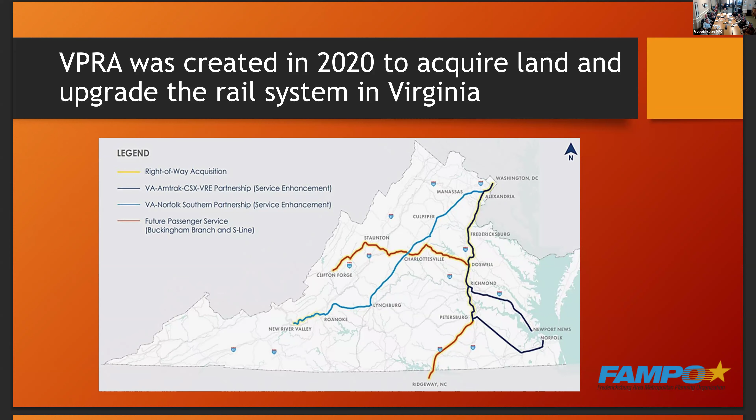The Transforming Rail in Virginia program includes a whole bunch of projects down the line from Union Station all the way to Richmond. The long-term plan is to have a third track all the way down to Richmond, but they're building it in sections, and it will take quite a while to finish it all.

If you look out the window as far as the river, you'll see the bridge across it only has 2 tracks, and there's no space to add another track on that bridge. So you can imagine what it's going to take to put a third track across the river. It's a huge program.

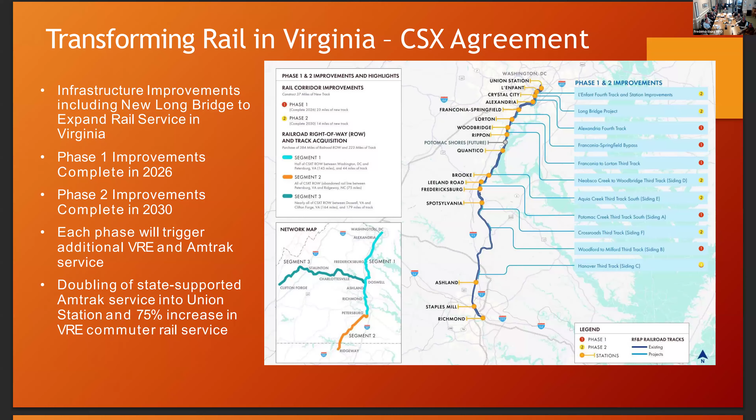Each one of those dots represents a new section of track or a new project that has to be built, and we'll talk about those as we go through the presentation. Phase 1 is largely complete now, and phase 2 will be complete by 2030. It involves, well, we'll show what it involves. I'm not going to read everything on the slide, so let's move on.

Here are some of the major projects. The first one is to run 4 tracks from Union Station through Alexandria and a portion here to Springfield. What happens over this section is that the Norfolk Southern track branches off and goes down to Manassas. But we currently only have 2 tracks across the Potomac River, and a new bridge has to be built to carry another 2 tracks.

So we're trying to get 4 tracks through to roughly Franconia, and then from there down 3 tracks all the way to Southern Stafford effectively, but eventually to Richmond.

In our region, there are a couple of projects. The Aquia third track section and the Potomac Creek third track section are going to be added, so those will have a third track through there, and each one has a VRE train station that has got to be upgraded as well. So that's going to be worked on.

We've already upgraded the Fredericksburg train station. I think you remember seeing some work going on up there. We've extended the platforms so they can take much longer trains, put up new signage and new information screens, and built the new staircase into the back of our parking lot, which you could see on the way out. So that's already been completed.

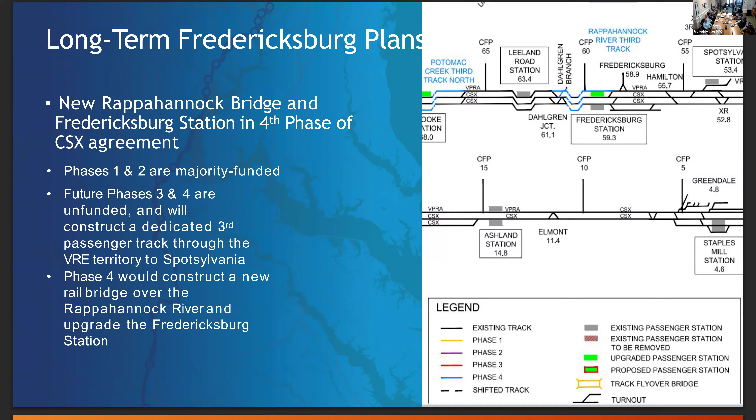Do you know how old the bridge is? The original bridge is very old—I don't actually know when it was built. This one in Fredericksburg is going to be 100 years old in a couple of years, and that's not even the first one; that was the rebuilt bridge, raised above all these roadways.

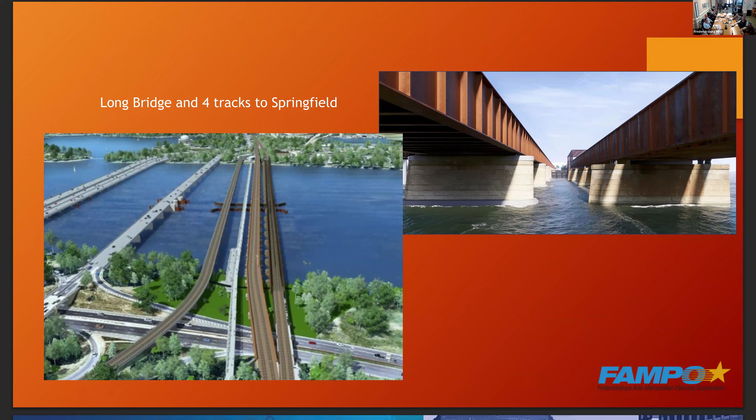The new long bridge across the Potomac is actually not going to be one bridge, it's going to be 6 bridges, because there's a bridge to the island, a bridge from the island across to the other side, and then another bridge over the roadways. But they agreed to build a bike and pedestrian bridge as well. So that's 3 bridges for the rail and 3 bridges for the bike and ped improvements. It's a huge project.

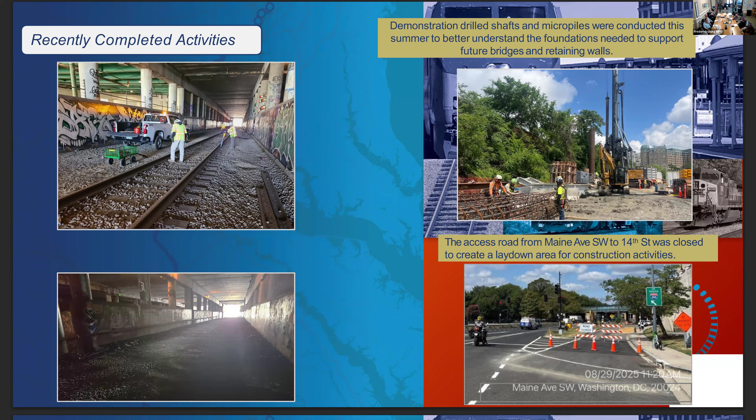So they're in the river already drilling, doing soil samples below the water, because they have to sink pylons and things into the riverbed itself. And they're testing alongside, I think north of the river, doing soil samples because they have to build a new bridgeway across all those roads as well. That's the existing bridge, and here you can see west of the bridge they have to fit in a new bridge. Next one. Okay, the Springfield bypass.

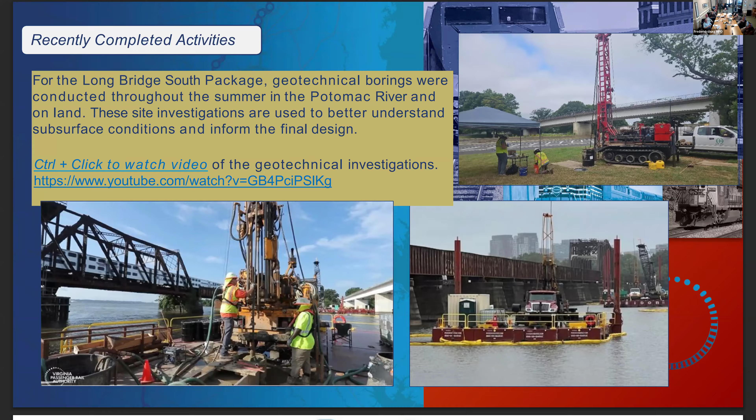This is complicated, but it's fairly simple to explain. We bought the rail right of way to lay the extra tracks in 2 sections.

From Union Station through to Springfield, all of the existing train stations are on the west side of the tracks. South of there, all the way to Richmond, all the train stations are on the right-hand side of the tracks. So they bought the left-hand side right of way and the right-hand side, the western side and the eastern side. That leaves you with this.

So they're building a big concrete flyover to switch the passenger trains from the western side of the CSX tracks across to the eastern side of the CSX tracks. And to do that, they're going to build this really expensive big concrete flyover in order to get across. You'll see some pictures of that happening here.

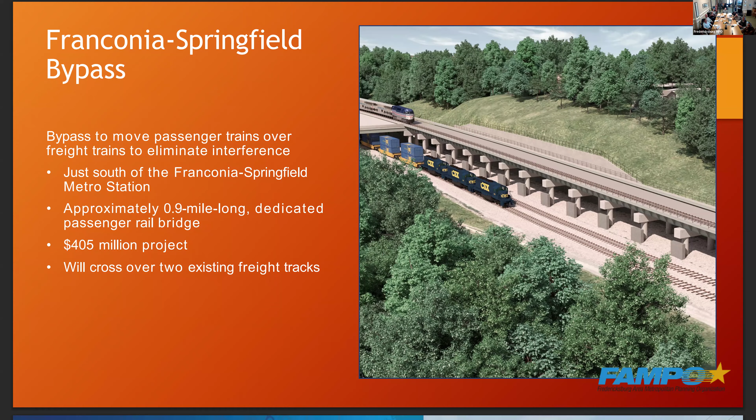And the idea eventually is to build a fourth one. One day when we're rich and have got a lot of money to spend, we will build a fourth track so that those 2 tracks will be CSX and these 2 tracks will be for passenger rail only. Then we can separate freight and passenger rail, because the freight trains go really slow, and if you're in a passenger train you don't want to be stuck behind a freight train because then your journey takes forever to get there. So we're trying to separate the two.

And this is to be able to get to the other track. You've got to be able to get into the center without walking across the tracks and endangering yourself. So they built elevators and stairs to get over to the third track. But this already exists - we finished this 9-mile section of third track, and they upgraded the station at the same time. So that's the first piece of the third track that's already complete.

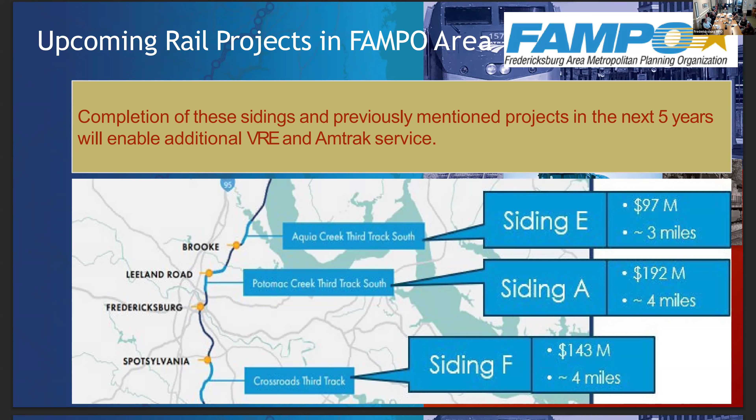So these are the next sections that will affect us. This one is going to be built first, together with the upgrade of the Leeland Road train station. We've done the Fredericksburg station. We're about to do the Leeland station and improvements, as well as the third track. And then later, in a couple of years, they'll get to the Brooke station and that other section of track that has to be built.

These are just some other details. They're buying new Amtrak rolling stock and other things.

So this is the part you already know. We lengthened the 2 platforms in Fredericksburg and put the back stairs here into our back parking lot, as well as remediation, repairing that bridge, this bridge, and one other bridge on the section. It's already done.

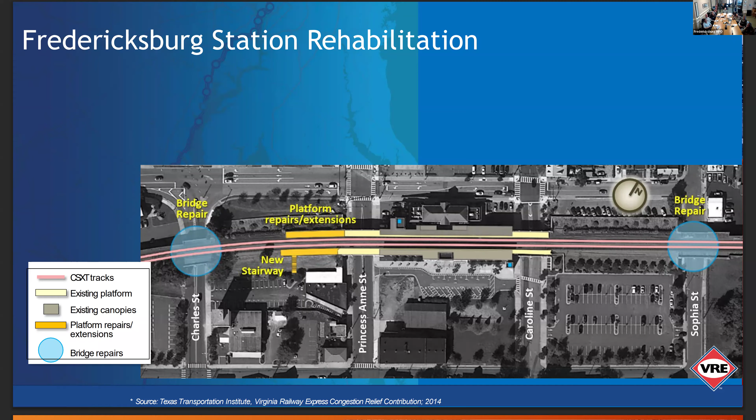This is what's happening now in Stafford. They've already started out there. We're acquiring extra right of way there. These 2 tracks exist, and this is what's being built by the Virginia Passenger Rail authorities - that third track through that section of Stafford.

Not exactly, I suspect. That shows wooden cross ties. Aren't they using concrete cross ties? No, they're wooden. If you go up here to the train station, you'll see they're all wooden now. Go and have a look. In fact, they're replacing the wooden ones up here above us with wooden ones again. The new ones are lying in a pile that are installed. Did they use concrete cross ties in Quantico? Yes, but here they're using wood. Huh, I don't know why.

How long did the wood last? Quite long. Well, in Africa, they use ironwood, which lasts for a long time. It's very hard wood that they use, unlike a lot of the softwoods that get used for wood carving and furniture. No, I put some pennies on a track at Widewater, and I was watching the trains go by, and that track was actually going like this. It's meant to move because of the ballast - the rock underneath, the crushed rock, is there to absorb some of that movement.

In fact, the tracks also need to move sideways because you'll notice on the track you don't hear that clickety clack sound that you used to hear on trains, because they've welded the track together. So the expansion joints are gone. If you weld it together and it can't expand, when the rail gets hot it has to expand sideways instead of lengthways, because they welded them together.

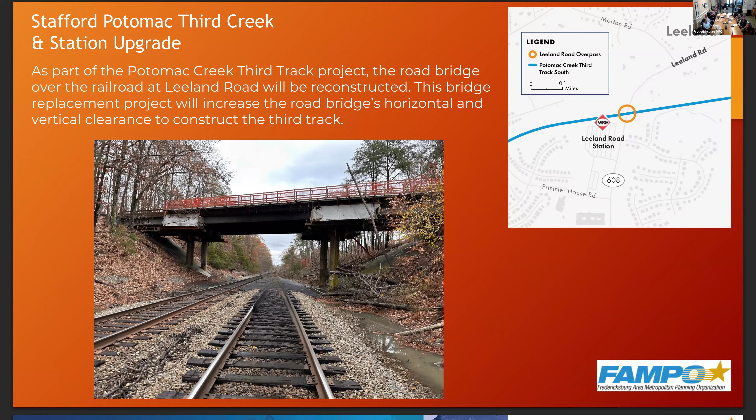So that's what we're in VRE. VRE is doing the station upgrade, and VPRA, the Virginia Passenger Rail Authority, is adding the third track. It's two separate projects, but they're doing them simultaneously to limit all the disturbance. So they're lengthening the platform and putting a new pedestrian access into the parking. They initially were going to put a whole new parking situation here, but they found that because ridership hasn't grown as fast as they predicted, they don't need the extra parking right now. So in future it might be done, but not now.

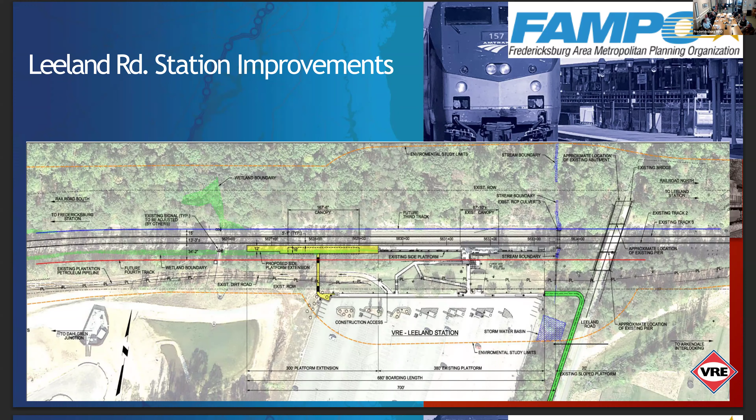They're also putting a bike and pedestrian path down the side to provide access for people who bike to the train station. So there's an upgrade, and this is the roadway bridge - the bridge that has to be removed to make that all happen. That's going to start happening from January on. It won't all happen in January, but the demolishing work will start.

You can see here improvements - they are increasing the parking capacity, but they planned a much bigger expansion and cut it down to a smaller package, estimating 225 additional parking spaces. Sorry, from 225 to 1,050 was the proposal. I have a feeling this is an earlier presentation that's been revised, so I don't think it's as dramatic as this, but I'll check for you on that.

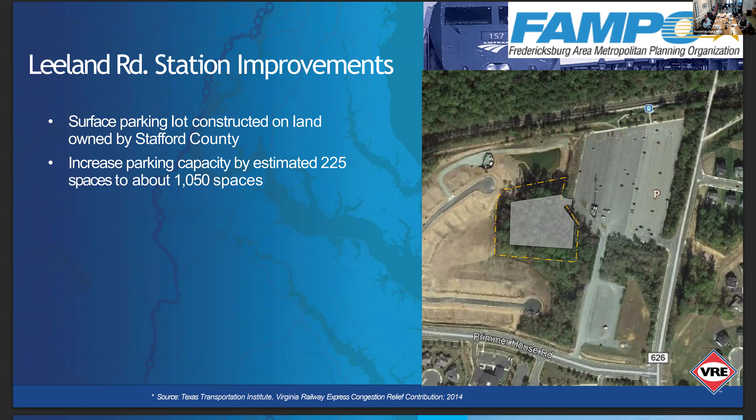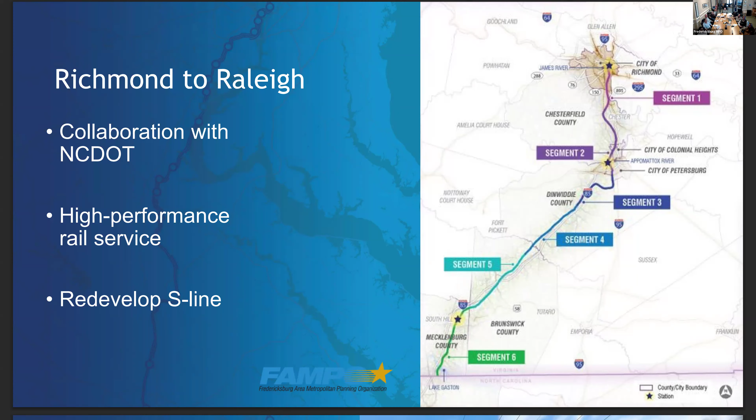So one of the delays is going to be removed by doing that, because when you go up to Union Station, they stop for half an hour because they have to take off the diesel locomotives and put the electric locomotives on. This is going to do away with that 30-minute delay. The same locomotive can go all the way to Boston. So this new train set is designed to do away with that - it'll provide a quicker journey if you're going further north, or if the northern people are coming further south. They won't have to wait in darkness because they turn off the aircon, turn off the lights, remove the locomotive - it's a bit of a process. So that will reduce the dwell times at Union Station.

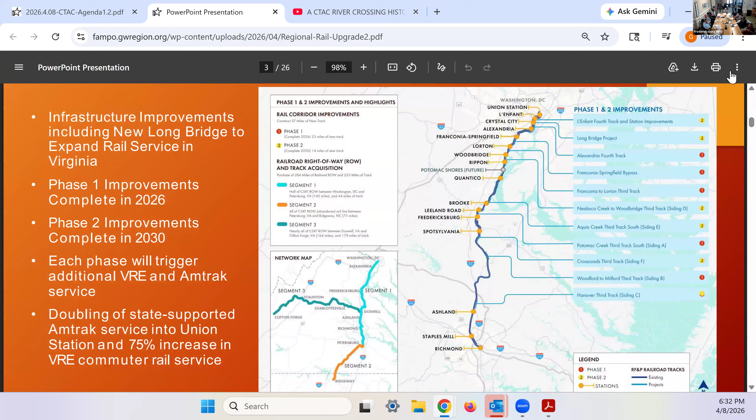Hopefully. I mean, it's a lot of money to build. Can we go back to like the third slide or so that has 3 tracks and 2 tracks? It's about the third slide. Keep going. Another one. Next one. Okay, yeah, that one. That one? Yeah.

See, I just don't understand how they can increase capacity unless the third track is all the way through. They pass — faster trains will pass the slower trains. But this doesn't seem like on the third track section capacity is long enough, because then you're gonna have to have some trains speed up and others slow down in order to do it. So it's gonna be a difficult situation.

And what if the train is on the far track? Are they gonna switch over 2 tracks? So all of that gets planned in advance, it doesn't just happen. Yeah, I understand that. So what they do is plan the schedule so that this train will get to that siding at the right time approximately. It might involve a freight train having to stop for 3 minutes, but generally they try to plan the schedule so that they move past each other.

The trouble now is you can't plan the schedule as easily, because weather events occur, a train leaves late, and then the entire schedule is scrapped, because that train was meant to get to that point so you can go past on the other track. Now it's not at that point anymore because one of them is late. And when you only have 2 tracks, it limits your choices, because you've got trains coming south and north and they have to pass each other. When you've got more track, there are more opportunities to get around the problem.

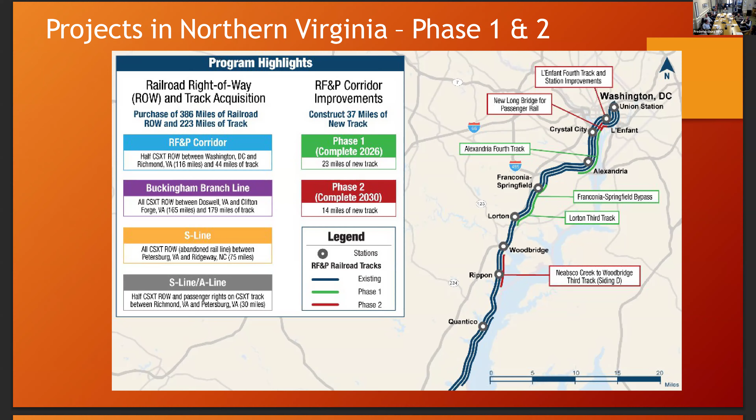There's only 2 tracks in the city of Fredericksburg, and no plans for a 3rd track. In fact, they just built the platforms up there on both sides of the 2 tracks. So if they do build a 3rd track in Fredericksburg, it already exists down to Spotsylvania. The Spotsylvania station is built on a siding, not on the main line. So that third track siding already exists there, but it doesn't come all the way into Fredericksburg.

There's a gap there in Fredericksburg with no 3rd track. The reason for that is the bridge and the train station, and this raised track. You've got to build a bridge over the river for the third and fourth tracks. You've then got to break down the train station on this side to fit the third track in, because there's no space for it. The platform is in the way. So they're going to have to totally break down this side of the train station to widen the platform, the concrete under the platform, to make room for the third track. And then you're going to build that raised portion all the way through until you get past the cobblestone condos, where it gets back to level ground again.

That project's going to cost a lot of money. This building might be in jeopardy too — the side near the track is going to be real close to that new track. So my guess is they will buy out this building so they can remove a portion of it to fit everything in, but I don't know, it's too early to say. They might also have to remove that new platform they built. Well, they might put the track on this side of the platform instead, so you'd have a center platform rather than a side platform. But that's TBD — they haven't even started the design yet, so there's too much information we don't know.

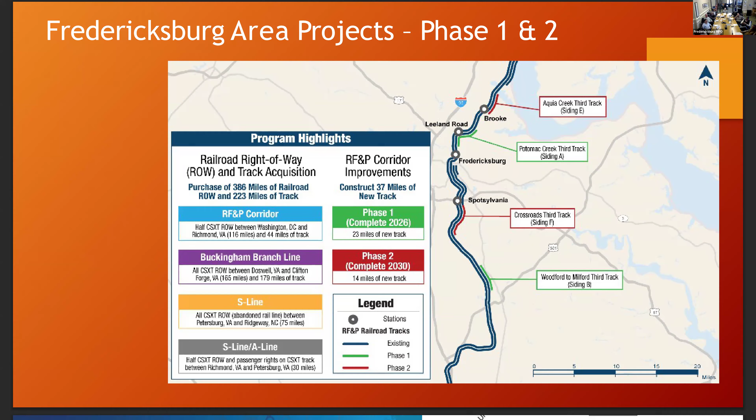I'm going to sit down and get it in before somebody else asks.

Thank you, Director Alice. Moving on to 7B, the long-range transportation plan presentation. Eugene, you're up.

So we wrapped up our long-range transportation plan 2055 transportation goals and needs survey on March 17th, a few weeks ago, with 1,073 survey results in total. For this presentation, I'm first going to give you an incredibly high-level overview of what we've seen, and then following that, I'm going to go over how you can access the survey data yourself.

Reviewing the comments, we've seen broad trends pointing toward an emphasis on improving communication between transit agencies and the public, pessimistic attitudes toward infrastructure improvements due to existing infrastructure, slow progress, and public disinterest, an extension of Metro down to Fredericksburg and VRE down to Richmond, a need for more promotion of our FAMPO committees, and a VDOT report problem. There's a desire for developers to assist in improving surrounding transit infrastructure. There are frequent mentions of traffic light timing, and many comments about Route 1, Route 3, 17, and I-95. We also have several specific comments throughout the survey results — these are just some examples of those.

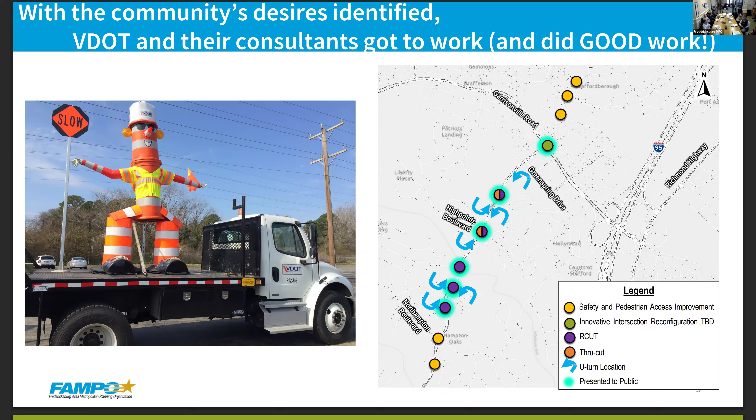Next slide. So VDOT and the consultants got to work looking at the various intersections identified within the survey and the safety results. I will say, finally, I was a part of this. They did very good work as far as identifying the treatments, doing the site visits, trying to identify what can be done and what are the better treatments within the constraints of the environment. So they came back, developed treatments, and put out another survey. Next slide, asking how folks would want it.

And this was kind of a shocker to a lot of the stakeholders in the group. We actually got very strong opposition to the treatments and projects presented on these roadways. If you look at it, a lot of the treatments proposed were pretty much restricting left turn lanes up and down this corridor to force basically a right turn. If you wanted to go left, you'd have to do a U-turn at another intersection or a thru-cut. There are very significant safety reasons for this, and if you're looking for items to prevent vehicle conflicts, turning point conflicts, this is usually a pretty good treatment, and the road conditions kind of warranted some of these items.

However, the community, and granted this is a smaller response rate of 180, up and down Mine Road here basically said, no, we do not want these. And it was across most, if not all, intersections where restricting left turns were included, including areas for the park and ride lot there, and even undeveloped parcels where there's not actually a current intersection to make a left turn — you still saw strong community response to those. So it wasn't just one neighborhood saying we don't want the no-lefts from our entrance point; it was across the board.

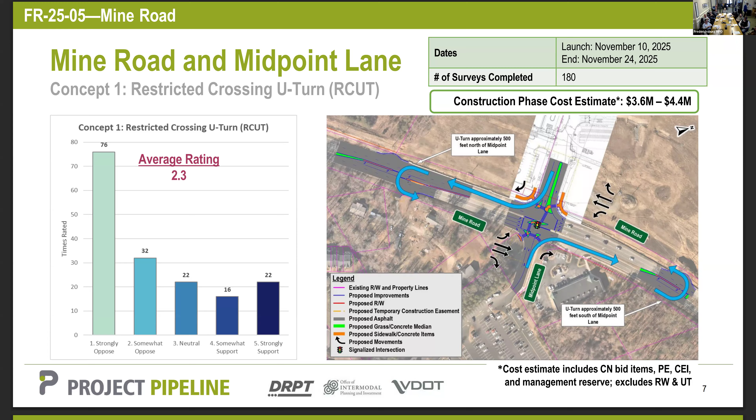If we go to the next slide, you see a very similar response up and down this corridor as far as strongly opposing these types of treatments. So this was kind of a unique thing. When you talk about surveys, if you ever want to show a survey that says there's strong community opposition, this is a good example, and you see that type of response in the ratings.

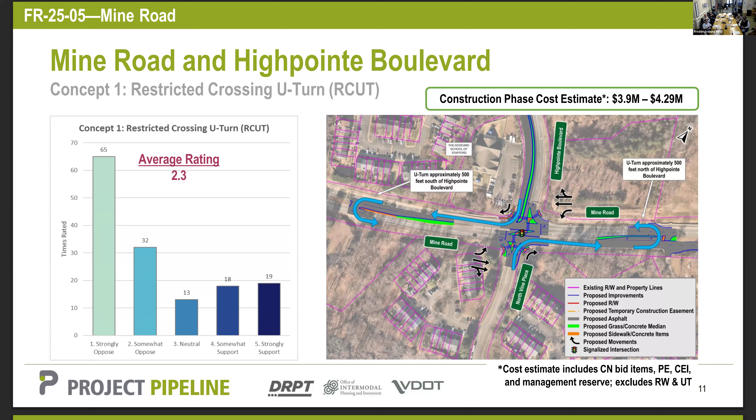Next slide. When looking at Mine Road, Staffordboro Boulevard, up to Garrisonville Road, you have a little bit of a different item.

So there are multiple treatments proposed, everything from a large widening to a full displaced left turn—that's more like the lane switch that happens at Courthouse Road on 95—all the way down to large grade-separated structures where you basically have elevated through lanes and your turning movements happen on a different level.

The community was generally a lot more split on this. There was more support for just adding more lanes along Garrisonville Road—that was the highest option—but it was mixed overall. This study was ahead of schedule and further along in project management, so they were able to offer cost estimates alongside the road treatments, one of the only projects to do so. There was discussion about whether that influenced responses, since we saw the more expensive the project, the less community support there was, regardless of other improvements.

How long is this project? That one basically goes from Interstate 95 to past Doc Stone. So they were looking at the main Garrisonville Road congestion—less than a mile for $193 million. Well, if you're building a giant bridge through that corridor with grade separation and on/off ramps, yes, but those were the items and concerns.

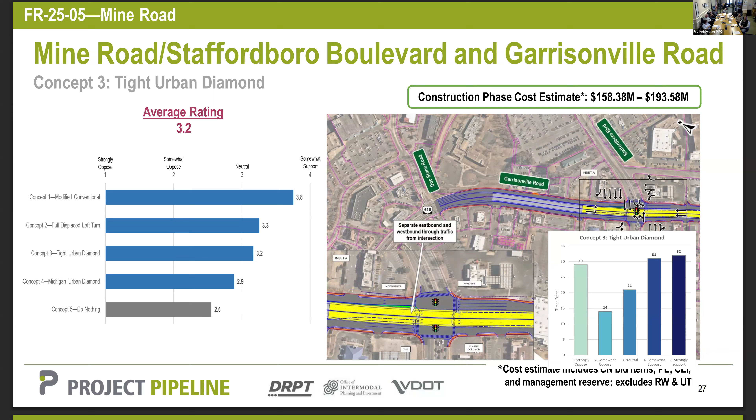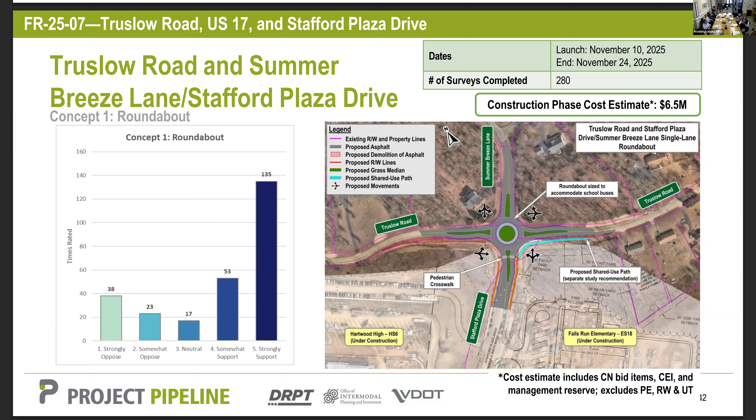So next slide. Okay, I want to give you a quick rundown. If you want to dig through the data, a good example of how to read the community response is: if you see strong opposition with low numbers, take that seriously, but also note that when it's being applied across the board, something else might be going on.

And we didn't know if that was cost. Garrisonville Road was kind of a mixed bag. And then we had very strong support for a roundabout.

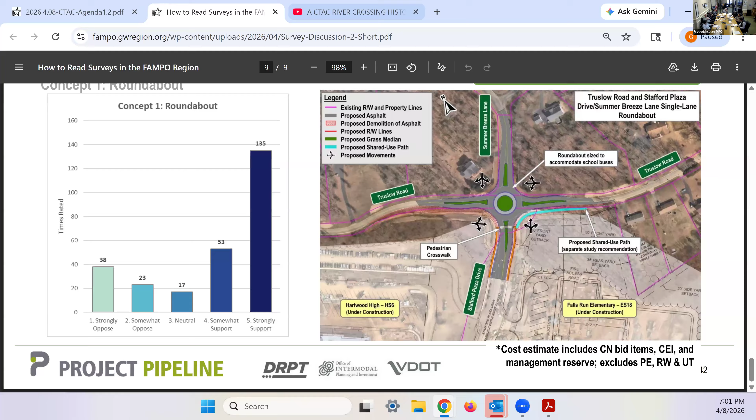So if you have any other questions—I know Jason wanted a bigger, deeper dive into some of these projects, to go through Mine Road and the projects there. So I'm probably going to bring this back to y'all, less as a survey thing and more as a discussion.

But I just wanted y'all to be aware of how to read example surveys in the area—be a champion of looking at those response rates, particularly when trying to gauge stronger and weaker community feedback, because this happens with a lot of surveys. In fact, you might have multiple conflicting voices showing up in a survey that aren't easily apparent; you have to slow-walk your way through to understand what's going on.

Okay, on this particular intersection, we'll know more about it in August when the two schools open. That will be our test run to see if the current intersection works or not.

Yeah. Also, on Truslow and Poplar, isn't there something going on there? Or?

I would think, further down, I think the county's looking at something, but I'm not 100% up to speed on activities at that. I think that intersection is probably more important than this one. Hopefully so.

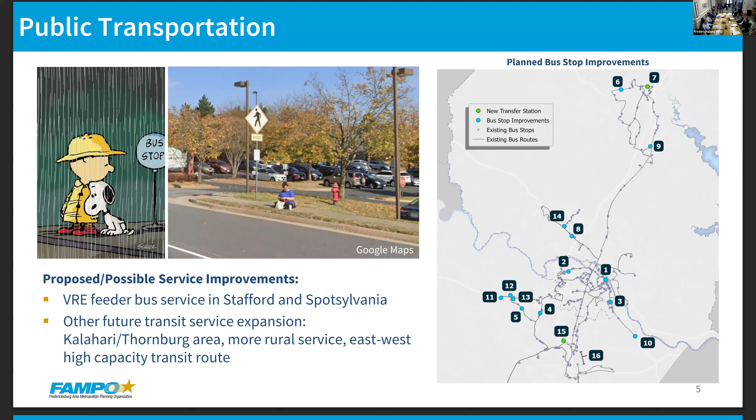So we're in the home stretch, finish line is in sight. We will have a final draft document that we'll be presenting to the TAC next month. Bring that to you all too, I guess. But that is kind of ahead of the public comment period.

So we'll be asking them, while that's in May, we're showing a final draft document. It's really for TAC feedback in the final stages, before we ask them to open up a public comment period in June. And then hopefully we can get this plan adopted in August. So I'll take any questions, but that is the status report on the Complete Streets plan.

There's a couple different plans and stuff, and one of them was using Brook Road. The one you showed, I believe, was using Truslow Road. Yeah.

Up here, so this is Truslow Road and the Greenway. And that's just from the last East Coast Greenway alignment that was decided on as a region, which might have been a part of the Greenway's plan.

But then also we have this western connector that goes up Plantation Drive, and a lot of roads that aren't built yet, but we're planning for those, like the Mine Road extension, and the Enon Centerport Parkway connector or Enon extension. So yeah, those roadways don't exist yet, but this is what the county has signed off on as their preferred route right now for future development of north-south bike ped.

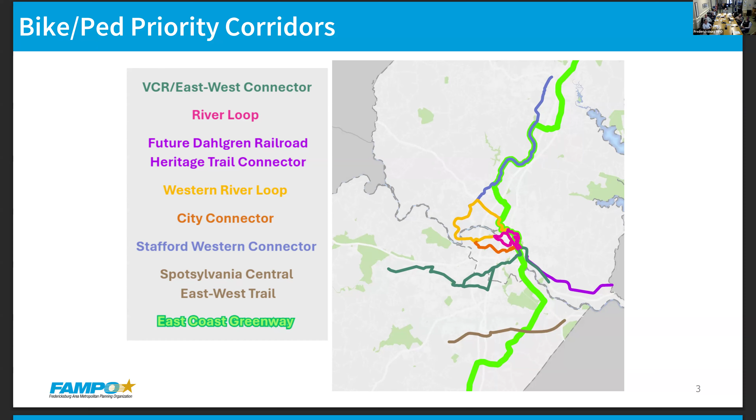I think right now, let's see, yeah, I guess they do have it planned as a shared use path there. I just don't see it happening, they'd take out the houses on one side, we'd have to do 70 houses or so. Of course, the east-west study wanted 4 lanes, trust me, so that would do it.

Any other discussion, questions?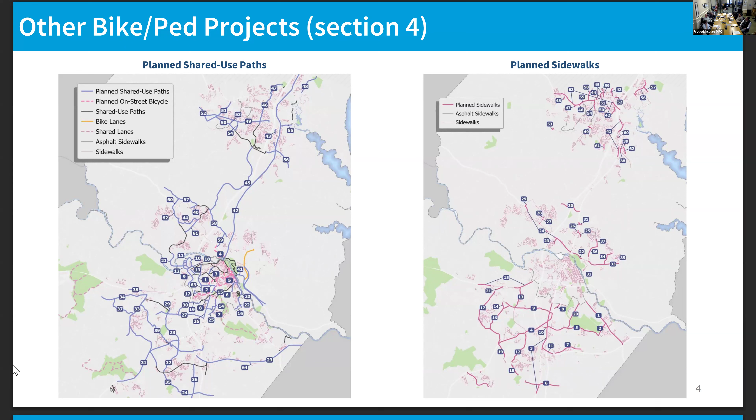Thank you, Leah. Moving on to number 8, Dr. Rideout, let's start off with the TIP amendment.

All right, opening for public comment, we have several TIP amendments open for public comment. You can find them on our FAMPO website under the transportation improvement program, under studies. There's a few transit program items for FY26, as well as a VDOT project happening. The VDOT project is going to be for the next month - forgive me, I'm always a month ahead. So those are open for public comment.

So just send us an email or your communication of preference, and we'll provide those to the policy committee. Next item, the technical advisory committee.

We had a meeting this past Monday, it was a very intensive meeting. We discussed a large amount of items, including opening public comment for the next TIP, so the FY27 is available. We are looking for our UPWP, basically FAMPO's public business plan. We're discussing the constrained long-range plan methodology.

Leah provided the complete streets item to the TAC, as well as Eugene, who provided the survey information to the TAC as well. And then we also provided a first look at the CMAQ fundings that the jurisdictions applied for funding for last fall.

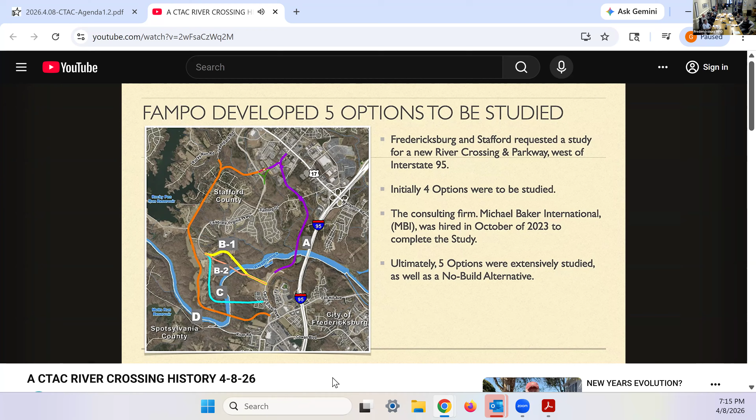The city of Fredericksburg and Stafford County asked FAMPO to study a potential river crossing between those two jurisdictions. At the outset, Spotsylvania County did not support the project. FAMPO initially developed 4 different options to be analyzed. A consulting firm, Michael Baker International, was hired in October of 2023 to complete this initial study. Ultimately, 5 options were extensively studied, as well as a no-build alternative.

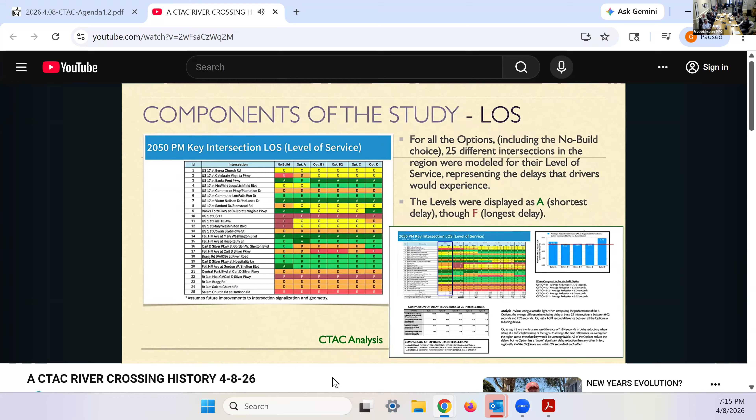The extensive study of the options included many components presented by MBI. There was level of service for 25 intersections analyzed by CTAC. Several different origin and destination routes were modeled to determine travel time between certain locations, also analyzed by CTAC. The different options were screened, particularly their environmental factors, again analyzed thoroughly by CTAC. Additionally, the travel demand of the different options was presented for PM peak hours, but CTAC utilized an entire day's daily crossing volume in their analysis to also view the impact on other existing river crossings.

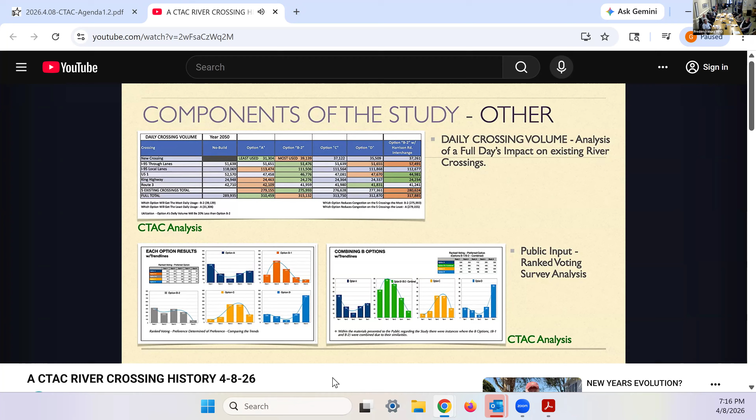Survey data from the public was also analyzed by CTAC, all of which led to CTAC's determination of their preferred route, which was presented to the policy board nearly 1 year ago.

CTAC's bridge and parkway differed from each of the existing 5 options. On the right side, you can see how CTAC's route differed from the original route created by MBI and a route created by FAMPO staff. Ultimately, on the left, you can see the revised consultant sketch of their final option C corridor.

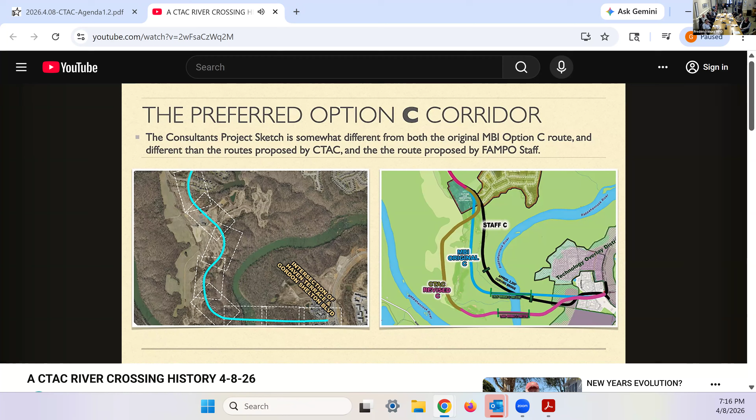Noting CTAC's differences, it sought to travel over consistent elevations, primarily over land that was already cleared. It sought to avoid more of the conservation easements than the other 2 options—see lines drawn by MBI and staff. It sought to maintain as much tree canopy as possible, and it utilizes the shortest bridge length.

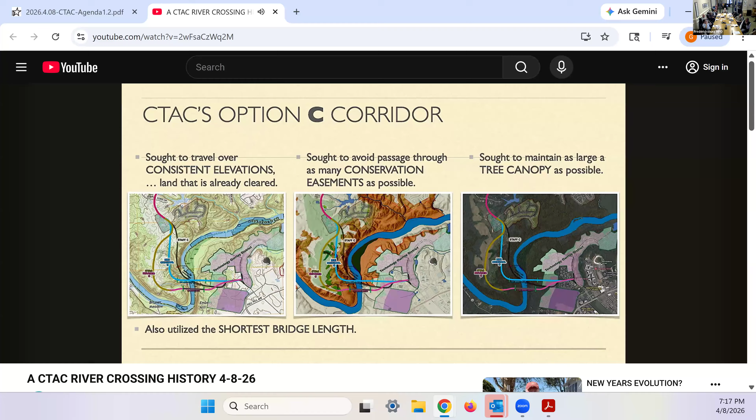CTAC's option C did not end there for several reasons. To be more impactful for the entire region, a second branch was created that went due south across the river, ultimately connecting to Route 3. As part of the final MBI report, it was noted that whichever route is ultimately decided upon, the opportunity to visit the historical sites of this region should become a part of the project.

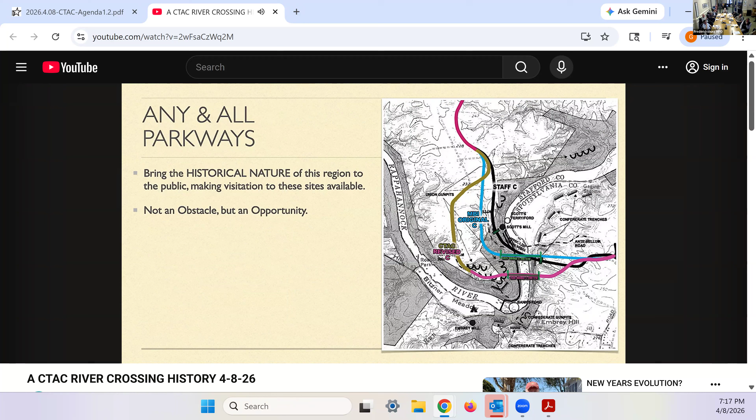As VDOT completed the study, they will determine the best location for a route, which may be entirely different from any of the earlier options presented, including the option C corridor. FAMPO has applied for a BUILD grant to assist in paying the costs of the NEPA study, which highlights the intent to reduce regional traffic, congestion, trip length, and travel time.

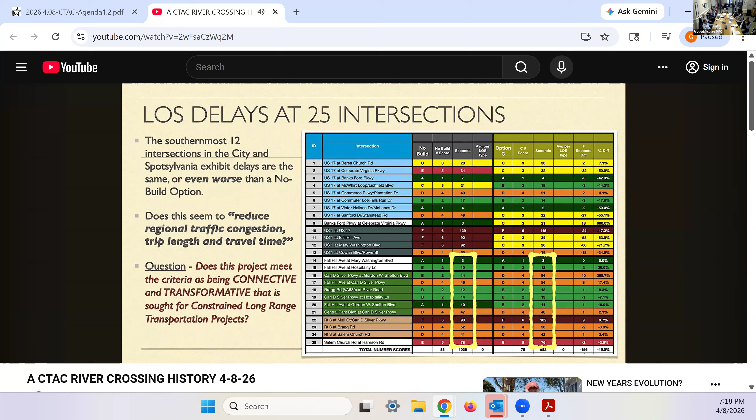You will recall, however, that in the 12 southernmost intersections modeled in the level of service study, the amount of delay for option C is either equal to, or in some cases worse, than if the no-build option is selected. This factor does not seem to actually create a reduction of regional traffic, congestion, trip length, and travel time in the southern part of the region, which is why CTAC proposed the second branch to connect to Route 3 in Spotsylvania County, creating a larger grid and providing choice.

That is it. That was quick.

Regarding the information provided by Michael Baker International, which was presented in various ways to different committees and to the public, we spent a large amount of time doing a deep analysis of everything, which led us to come up with a different option. It essentially used Celebrate Virginia Parkway, which some other options had also chosen, but we intended to move it a bit further west, south, and east. That's what we came up with. I wanted this available for anyone new who might wonder why we spent 2.5 years at great length on this.

If there's anything further to discuss or other questions, we have our other wonderful staff members here.

The river crossing idea actually started with the 1988 Stafford County Comprehensive Plan. From there, in 1989, some developers proffered right of way. Then around 1990, a study showed the right of way going to one particular spot, the best spot to go. But another developer came a year later and said that was on his best land, so he wanted to push the right of way over to the worst land. They accepted a proffer on bad land that went through basically a third of a mile of wetland, so it had to be an elevated road.